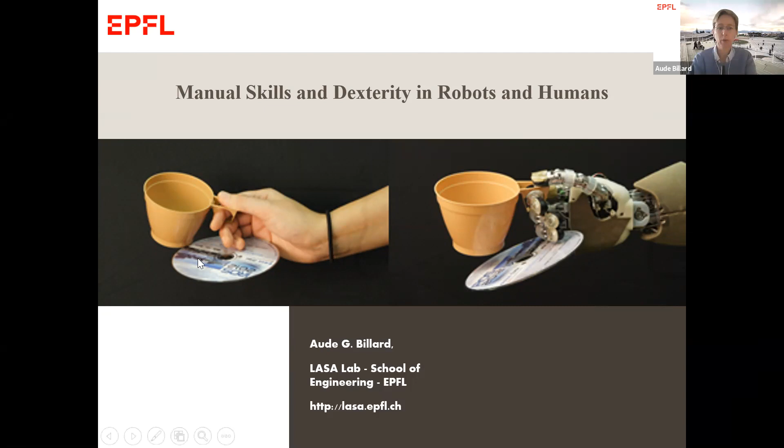The second part of the talk will be more about studying how humans actually achieve this type of dexterity. Two things are very interesting in these pictures, which are faked—not for the human, but for the robot, because the robot cannot yet do that. What I find fascinating is the fact that we really use all the degrees of freedom, multiple of them. If you look at what's happening in robotics, and it's still the case in my lab to a large extent, we can hold only one object at a time, usually at the fingertip. But humans can do much more than that—they can have multiplicity of configurations and hold different objects within the fingers, and they really use the full number of degrees of freedom that exist in the hand.

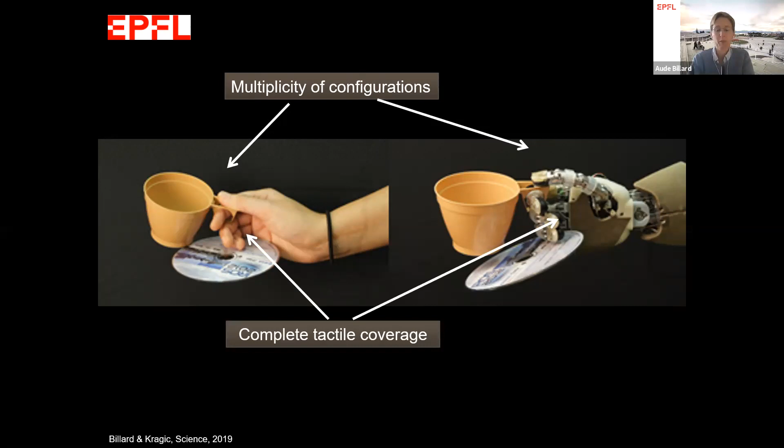And we are still far from that in robotics. Humans also benefit from a wonderful sense, which is tactile sensing, and we are capable of doing that much faster than robots can do. So we're going step by step towards this.

The first thing I wanted to present to you is this part of the work. In robotics, often, or for a very long time, people were trying to grasp the object around the center of mass to stabilize it, which makes sense, because you maximize your chances of not dropping the object. But if you look at the way humans manipulate objects, it's not that frequent that we actually hold it around the center of mass, for many reasons.

Here are a few examples of grasps that we do on a daily basis. Typically, the one in the middle, where we hold this cup from the very top, it's not that stable, but there is a reason: one wants to keep the lid down and not have the content coming out. It also happens quite frequently that we hold an object just at the very tip of the fingers when we want to hand it over to someone. It's polite, you don't want to touch the finger of the other person.

So these types of grasp are not that usual in robotics. There is a lot of work in robotics these days to try to infer what you want to do with objects, the functional components of the grasp, in order to infer what will be the best grasp for the function. But it's still very open-ended, and we don't quite know how to model this function.

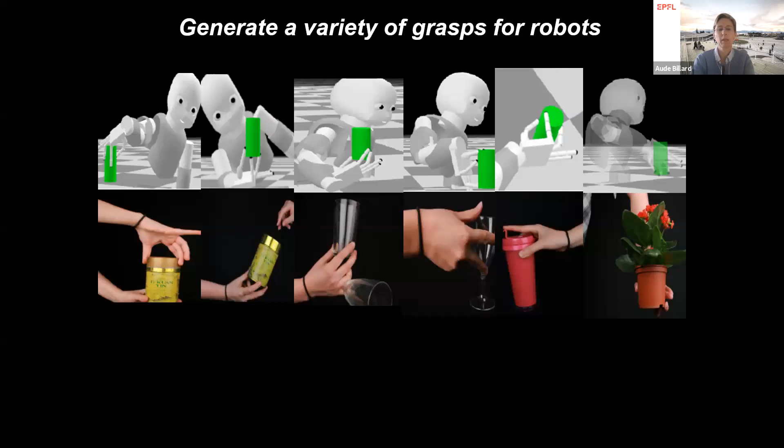Without having the fingers hit each other, you get all sorts of poses, and that's the funny thing, we got lots of them. I'm showing you this pose, and just below it, the equivalent pose in the human. But really understand that there is no intent in the way we solve this problem that gives the robot the information that this is the particular pose or motion we're looking for. It was simply solving for it from an optimal control viewpoint.

We actually got about 1,500 different poses, but when we looked at them, we could cluster them into subclusters, about 14 different categories. Now, solving for that at runtime is very slow. We can solve it on a big computer, but it still takes at least a good second, and from a robotics viewpoint, 1 second is slow, especially when you manipulate objects, because you want to be able to do that in milliseconds.

Can I just quickly ask, you said 1,500 for your 9 degree of freedom actuator? Yes, 1,500 solutions. So where and how is the cutoff for counting them as a solution? That's when the solver stabilizes, when it finds a feasible solution. Because it's a non-convex optimization, the solution you find may depend on the initial condition.

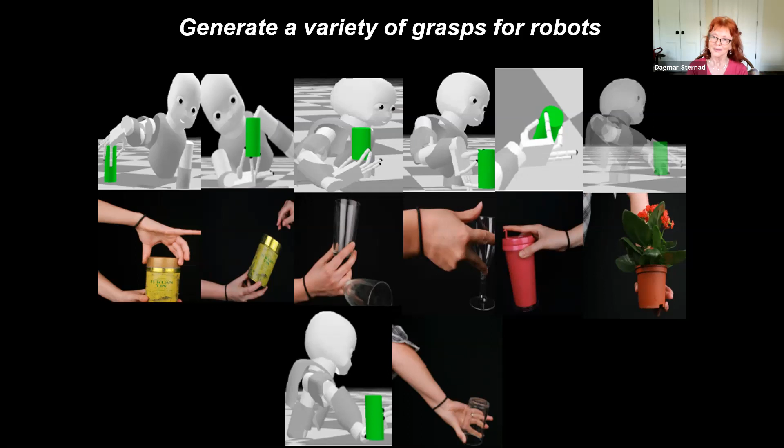So you can bootstart your solver at different configurations. We sampled the initial joints, different configurations to start with, and then we solve. So even though you have 9 degrees of freedom, you end up with many different solutions. But in the end, these solutions are not that different. What differs is the position of the fingers on the object, typically, and also the joint configuration of the fingers.

What is the error function here? How are you deciding what the solver is trying to optimize?

The solver is simply optimizing for torque minimization, at the fingers. Each finger will generate a torque to hold the object. Each of the joints, in fact, will generate a torque, and so we compute all the torques for all the joints. We have 9 of them. And we minimize the overall torque, or overall force if you want, that will be applied on the object. Then we have a set of constraints.

Many of those constraints are nonlinear. This is why it makes it a non-convex problem. Some of the constraints are that you have to satisfy the forward kinematics, so it needs to be a feasible grasp, kinematically speaking. You need to make sure the fingers do not intersect with one another, and that a finger does not intersect with the object either. They must be in contact, but not intersect.

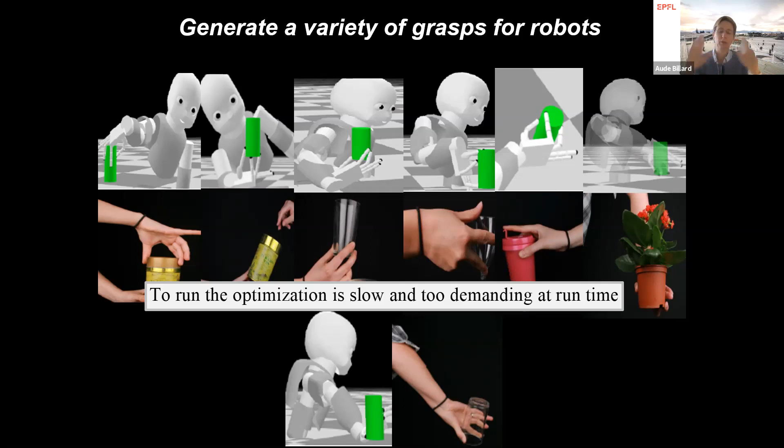Because it was so slow, we often like in my group to balance machine learning and control. So to do the retrieval faster, what we did was take all these solutions. We have a wealth of solutions, about 1,500 of them, and then we can populate this into a machine learning algorithm. So what we did was simply learn the distribution of feasible postures on the cylinder.

These postures are represented as the hand position with respect to the object, a relative frame of reference. The position and orientation of the wrist, if you want, with respect to the object, and then the finger joints. We reduced that to 8 finger joints because one was not very useful.

With this, we can generate—and this is of course just a visual representation. Here we've done PCA and took the first 2 principal components for visualization, but the dimension is much higher than that. From this, we learn a distribution, using a Gaussian mixture model, which is a mixture of Gauss functions. What you see illustrated here is the manifold of feasible grasps—within these highlighted regions, every single posture is feasible according to the problem we've set.

That means there is a kinematically feasible solution that satisfies all the other constraints. Everything outside is an unfeasible grasp. But once you have this expression, the nice thing is that you can solve and find a feasible grasp in milliseconds. So it's a bit win-win from both worlds.

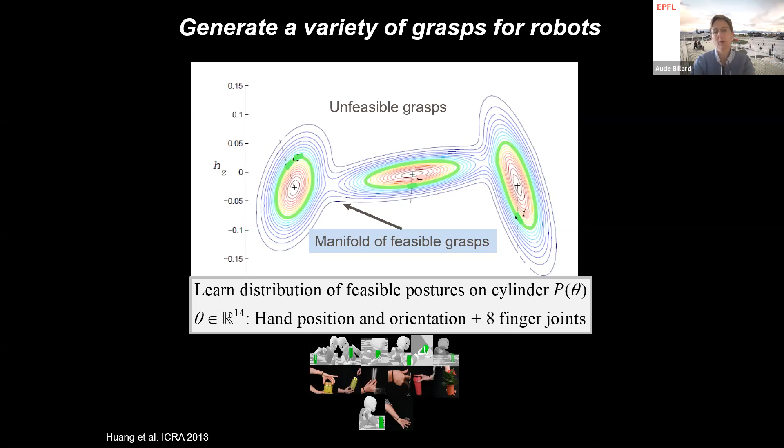You first use optimal control to find a solution to a very complex problem, but then you store that once and for all. It's a little bit like a human who will search first for a solution, and then once found, they just store it in memory. So it allows us to store it in memory.

At runtime, if we start from a location far from the object, like I'm illustrating here, all you need to do is a line search, and a line search is extremely fast. A line search on this probability density function—as soon as you enter an area that's highlighted here, which is highly likely according to the likelihood of the PDF, then you're satisfied and you know you have a feasible grasp on this object.

And you see here typically the example we can find in simulation. Everything was trained in simulation on a robot trying to grasp a cylinder. But what was really nice is that with what we call in robotics 'pre-shapes,' it was sufficient to have all these solutions to be able to grasp many different objects. We could show that we could really use this to hold objects in ways that are usually not seen.

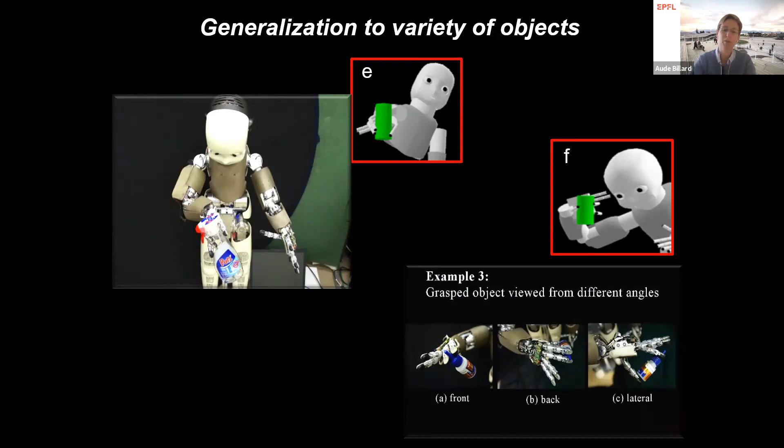I like this one particularly because you see the two fingers at the top holding the object just between the two phalanges, and also applying forces to rebalance the grasp on both sides.

Here are a couple of other examples, typically carrying a wine glass or champagne glass, which is something humans do with the thumb on top of the glass. There are many applications of this grasp—it's sufficient to have this pre-grasp to hold both a wine glass and a cell phone. You wouldn't think it's the same grasp, but it works for both.

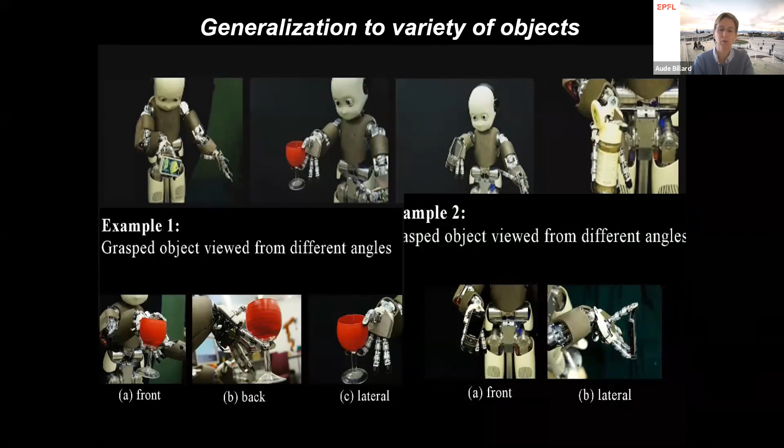Now, for roboticists it may be obvious that what we did not take into account was the problem of stability. It's implicit because we're computing torque, we're also computing force closure and feasibility, but it's too sensitive to being exactly at the right posture. So here's an example: if you're not exactly on the object where you planned to be, it will drop from the finger.

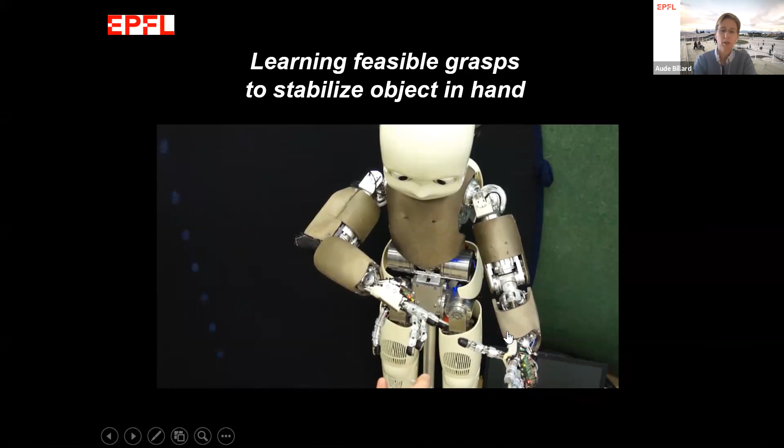So we decided to move this one step further, going back to our idea that we have a manifold of feasible postures, but they were purely kinematically feasible. Can we enlarge this representation to include things that are stable from a force control viewpoint? For that we needed a way of measuring what it represents to be stable, and since we're using machine learning techniques that can handle relatively high dimensions, we decided to include tactile information.

So we gather this tactile information, placing ourselves in the frame of reference of the object, and generate an estimate of how to control it. We estimate that we hold an object as if we had a spring and damping system. So what we need to learn in this new manifold of feasible posture is both the joint posture—the kinematics—and the force control posture, which we translate as a stiffness coefficient at the fingertip, and the relative position of the fingertip to the virtual frame representing the center of mass.

So we're basically learning the spring constant and the rest position of the spring, and we want to associate this with the tactile data.

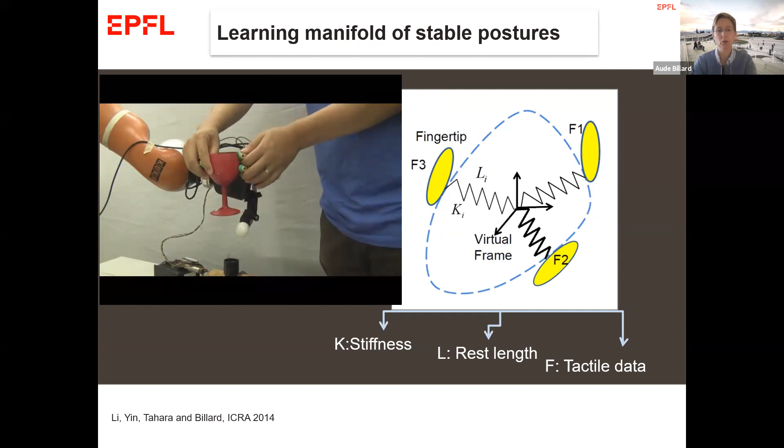We can gather all this at runtime and train the system by showing examples—this is one among many we could show. We show the robot: once you've chosen a posture, how much can you vary the position of the fingers on the object before you drop it? You can use this to learn the distribution—a distribution of position, kinematics, and also this notion of stiffness and rest length.

Then at runtime, when we get a perturbation like here, we can retrieve the expected stiffness and the expected position of the finger, which is translated from the rest length and the distance to this virtual spring. You can adapt to perturbation.

What you see here is that the robot refuses to adapt to this last perturbation. Observe that it adapts nicely to horizontal translation, refuses to adapt too much to vertical translation, and definitely refuses to adapt to rotation. That was done on purpose because we wanted the robot to remain stiff in certain directions—we could teach directional stiffness, so it's very compliant in translation but very stiff in orientation.

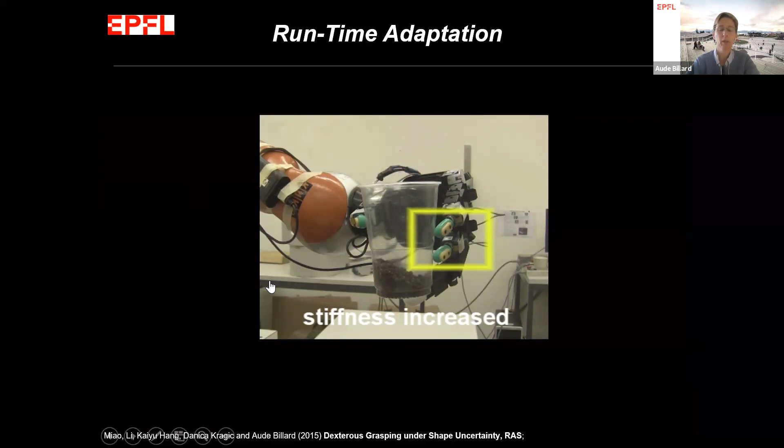We then pushed this further and trained it with many different examples, with different mass distributions in different objects and different joint configurations. This showed the robot could generalize, including changing stiffness according to a change of weight. The principle is always the same: you embed that into a representation of what is feasible in this kinematic and stiffness space, and at runtime you can retrieve the desired stiffness or the desired position of the finger.

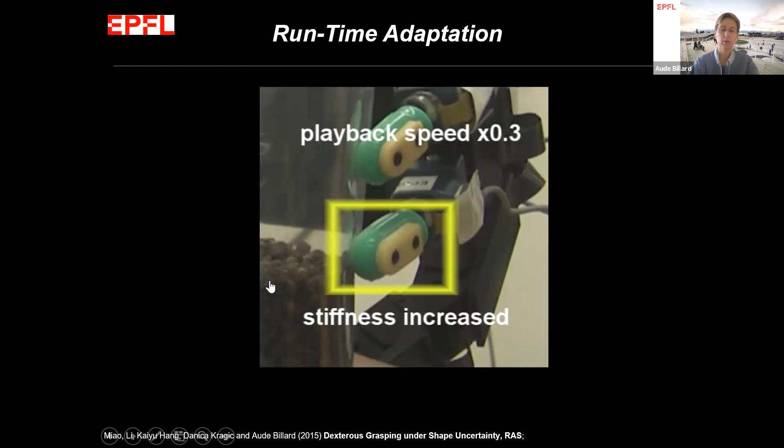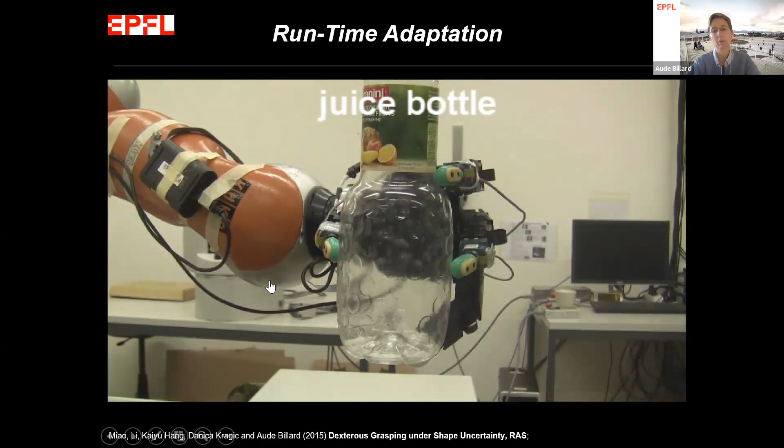That allowed us to do things we like in robotics that are still difficult. It seems very simple, but being able to move the finger to restabilize at runtime is called regrasp, and it's difficult because you have to do it very, very fast. We can also generate this.

For roboticists interested in more detail: you need one thing further—to know where it's feasible to move the finger fast. For that, we need a representation of the manifold of feasible posture onto the object, which one can also learn with another machine learning technique, and then we can project onto this manifold the solution in joint space.

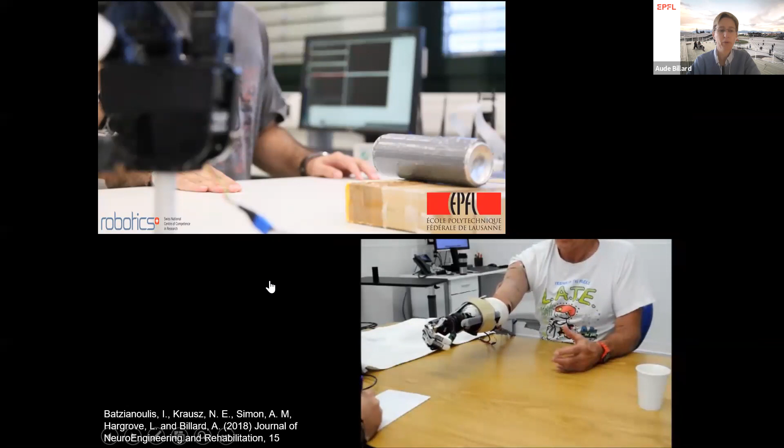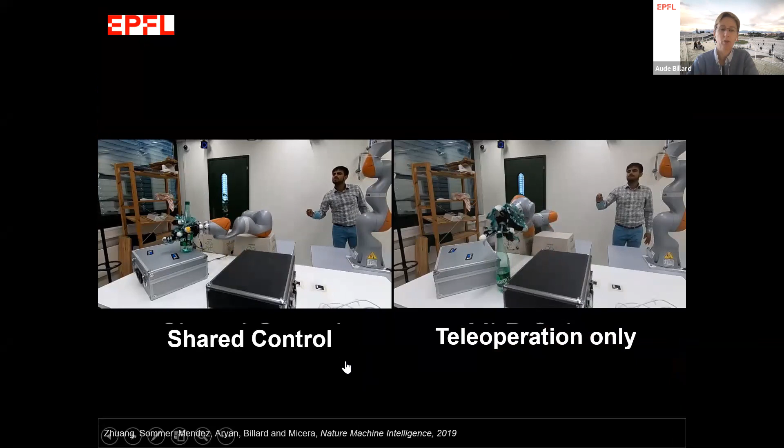Recently, with a colleague at EPFL, Silvestro Micera, and also first with Levi Hargrove, we worked on getting this used for prosthesis. You see here first the work we did with them to detect automatically a grasp from EMG data. Then we worked with Silvestro Micera to see if we could combine our control system to stabilize the object in the hand, shown on the left-hand side, used in combination with EMG control.

I'll play this a little slower. On the right-hand side is a control system which is purely teleoperated, only detecting EMG, which is noisy but still fairly precise. This is work done by these colleagues: they can detect the EMG to close and open the grasp, but also to control each finger independently. The problem is there are lots of noisy detections, so from time to time the fingers will reopen. We combine that with our stabilization controller, and we could show that it's much more stable with shared control.

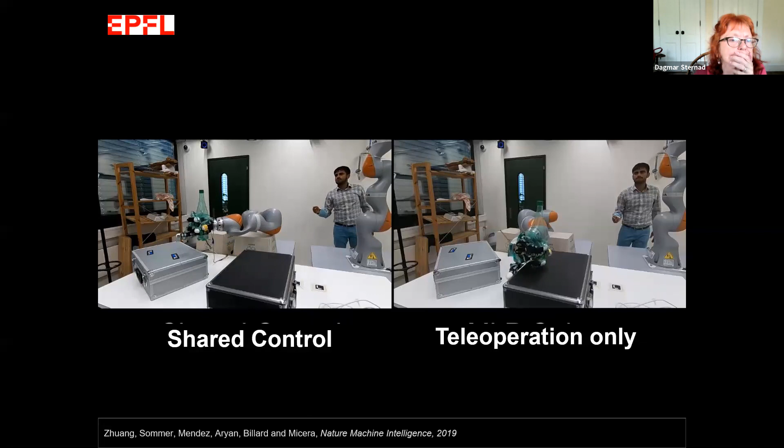So how many muscles, and how does it map onto the degrees of freedom of your hand?

First, we don't control the arm with EMG muscle signals. The arm of the robot is controlled simply by tracking the motion of the arm of the person. For the hand, I believe they're recording 9 muscles, but it's not my part so I'll have to double check. I believe they're measuring 9 muscles in the forearm that control the wrist and hand, but I'm not totally sure.

And how do we map that to the robot? We don't have enough—our robot has 16 degrees of freedom, so it's not 16 to 16, it's 9 to 16. We actually reduced that further, to 9 to 5. We control each finger separately: thumb, index, and so on. Our robot has only 4 fingers, but we control 2 degrees of freedom for the thumb, so it's 5 total.

And how do you decide on the grasp pressure, since that's so important to keep it from slipping out of your hand? We have tactile sensors—I don't know if you can see them—covering the inside of the hand. As soon as we sense the pressure, we have ways to rebalance the force and change the position of the finger to ensure a stable grip.

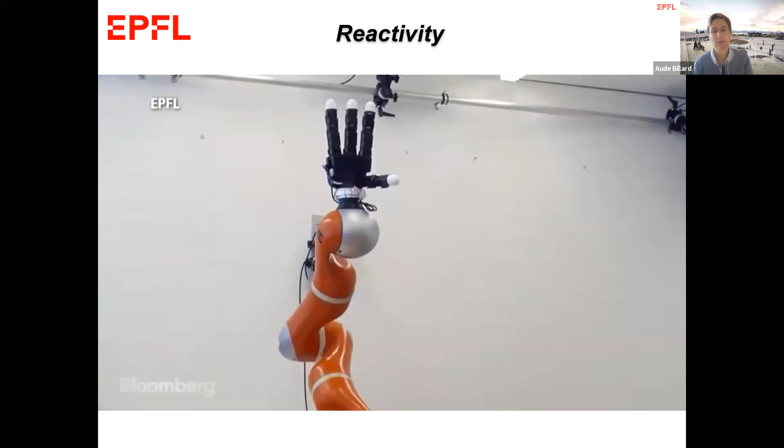This is a typical video some of you may have seen—one of the first examples of what we could do, which we presented in various places: catching objects in flight, as you can see here. What's the challenge? The challenges are numerous, but we made it very difficult in the sense that we wanted to catch objects that are flying fast and are not balls—in other words, objects that don't have three axes of symmetry, where you really have to orient yourself to catch it. That's where it becomes difficult.

This is where robots become a little better than humans. This is Lucia Pais, who was a very good PhD student in the lab. I'm as bad as she is, and most of us are bad at trying to catch an object like this—unless you train yourself, it's very difficult to catch an object that is not a ball.

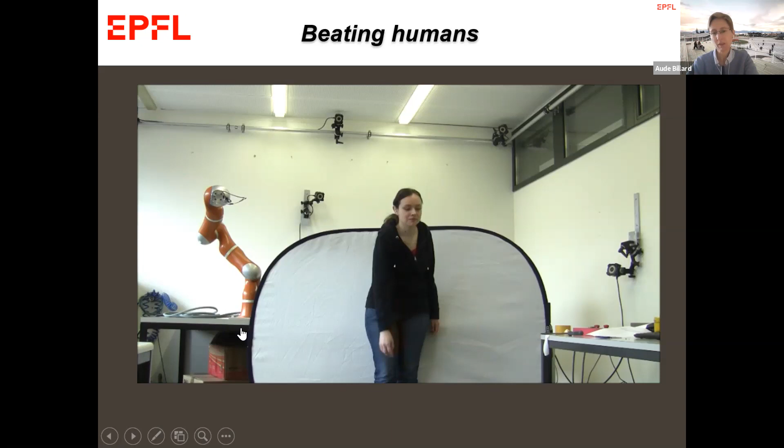So the way we approach this problem—I'll describe it briefly. For the robotists in the room, you're familiar with the fact that when you want to plan from A to B, you have to solve, possibly with optimal control, and compute a path that will eventually bring you there. When we just consider catching a ball, we need to compute a path that leads us to the ball, but we don't care so much about the orientation.

So the only thing that we need to care about is which path do we follow. Is it a straight path, but straight in what? In Cartesian space, in joint space? And as soon as you say that, you're already opening the box of what is the cost function. There are an infinite number of paths and an infinite number of solutions, and it completely depends on where you start from.

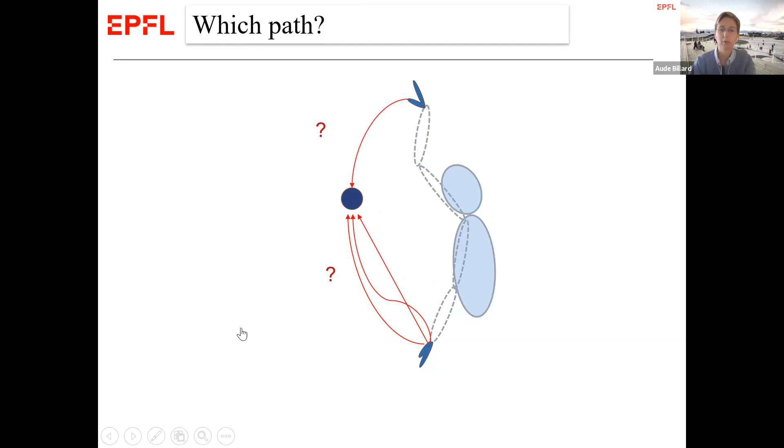So the way that we deal with this is to say, look, what we'd like is not to have to solve it at runtime anymore. We want to do the same as what I described before, maybe you solve for the optimal path, optimal in terms of so many different things: kinematic feasibility, dynamic feasibility. It could also be all sorts of other things, avoiding obstacles, minimizing torque, etc. But once you've solved for that, you want to store a control function once for all that you can retrieve at real time. The only way to store that is to have an actual explicit function, an analytical expression for this solution.

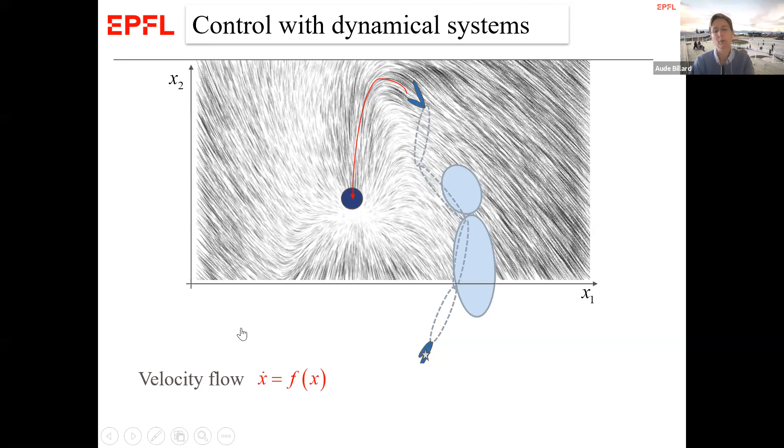So the way that we do that is by using a time invariant dynamical system. Here I write a simplified version of an equation, where we're going to control the motion of, for instance, the end effector, as I illustrate here, but it can also be done for joint control, and you'll see examples of this with a humanoid robot in a second. We control that in velocity space. So let's have a velocity flow, unique and described uniquely by this function f of x. And if I have a number of properties associated to this function f of x, then I have a closed loop control system that I can rely on thanks to those properties.

Now another question is, what happens if the object moves? Can I reuse this flow? What we wanted is to be able to reuse it, especially because we wanted to catch things flying. So clearly the thing moves, and you have to adapt to the motion all the time.

So a little trick is simply to place your frame of reference on the object, the origin on this object. Not just the origin, you can also align the entire frame of reference to the object, which is something we do to keep the orientation going. Then each time the object moves, and that's your attractor, that's where you want to get, that's your stable point, all that happens is simply that you incur a perturbation in this flow. But this flow has an infinite number of solutions, and all of them are sure to land you at the object. So we construct a function f of x, which we know to be asymptotically stable at the origin of the system, and the origin is on the object that we want to track.

And the question is, what is f? So to get f, we can either train a robot, typically by human demonstration. This is an example, you could train, move the robot, and show different examples. Or these days, we do it with optimal control. So we solve, as I explained before, with kinematic feasibility and all sorts of other constraints.

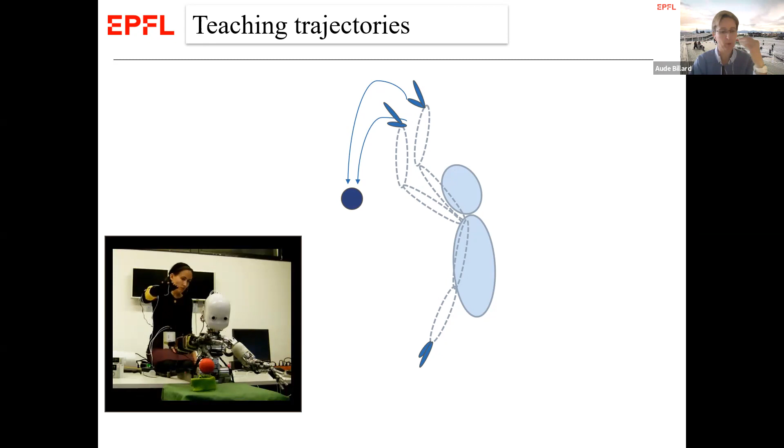Once we have that, then we can learn a function, and we want to learn this function and ensure it's stable. Of course, in machine learning, you can use all sorts of techniques to learn this function, but none of them by construction are stable. Here are example illustrations: if you learn this with support vector regression or neural networks, you'll have a very accurate representation of the dynamics, a very accurate expression for f of x, but you won't be sure to stop at the target. And it's catastrophic if you don't stop, because you may just generate motion on the object as you catch it and then let it fly somewhere else.

So we revisited this machine learning technique. We've been doing that for years now. We just go back to the optimization problem of the machine learning technique, and then we impose control constraints. The first control constraint is the one I mentioned before: you want to converge to a fixed point. Typically, you want the origin of your system to be stable, and you want the system to be asymptotically stable like this.

There are different ways in which we can solve that, but when the function is nonlinear, a lot of people use Lyapunov stability. More recently, we've started using also contraction theory, working with Jean-Jacques Slotine. But I'll present here the simplest version, which is Lyapunov stability.

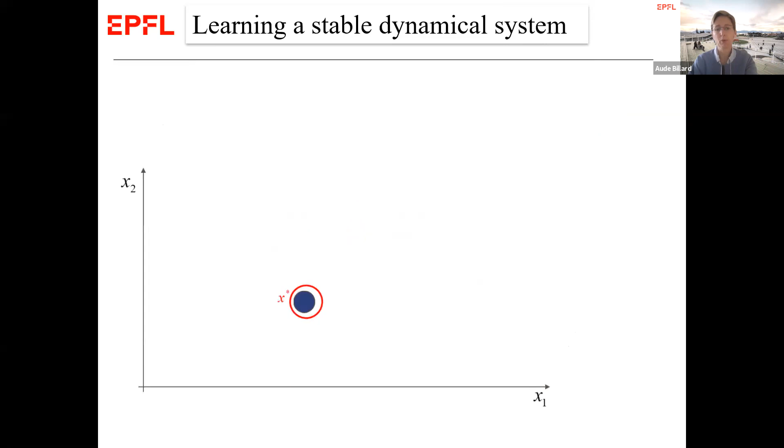So the problem is what is f and then what is v, because we have neither the Lyapunov function nor the function f. So we've shown different ways in which we can learn either f or v or both of them. I'll present to you only one example where we fix v.

So we have examples of trajectories. We want to learn now a function. What we can do is use, for instance, a probabilistic model, which is a distribution of velocity and position. I'll go a little quicker here.

When you want to query for the velocity, you have a closed form solution. In fact, for all machine learning techniques, when you query for the expected position or expected velocity, you get a closed form solution. So that's nice. That's the form that we're looking for. But it's parameterized, and the parameters are usually learned by maximum likelihood or convex optimization, etc.

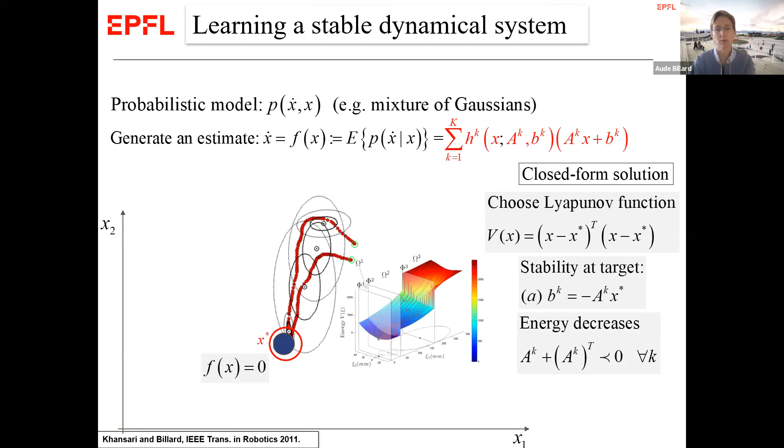So we revisited that, and then we applied a different function. Here, the Lyapunov function was simply quadratic, and then we derived constraints explicitly on the parameters of the machine learning algorithm. That will enforce stability at the target, and that will also enforce that the energy decreases such that your system is stable. That was the very first work that we did, and then we had lots of other things that are extensions of that. I won't go there. I'm happy to send paper.

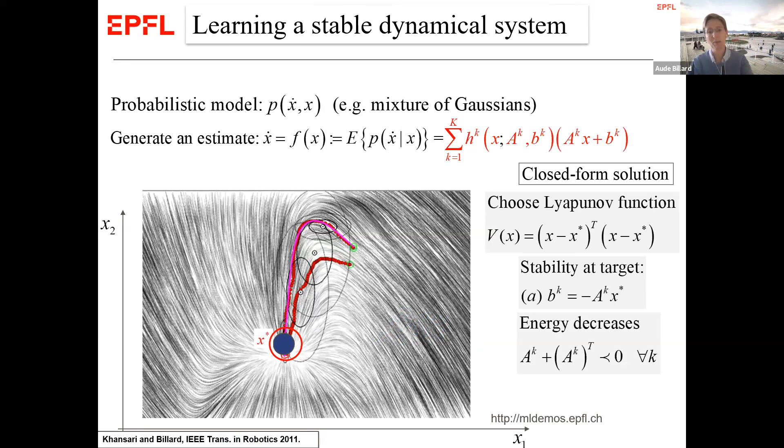And so that gives us this nice functional. You have it in closed form, and then you can do many things with it. So this is the simplest that you could imagine, is simply to go to the object and stabilize at that object, as you see here.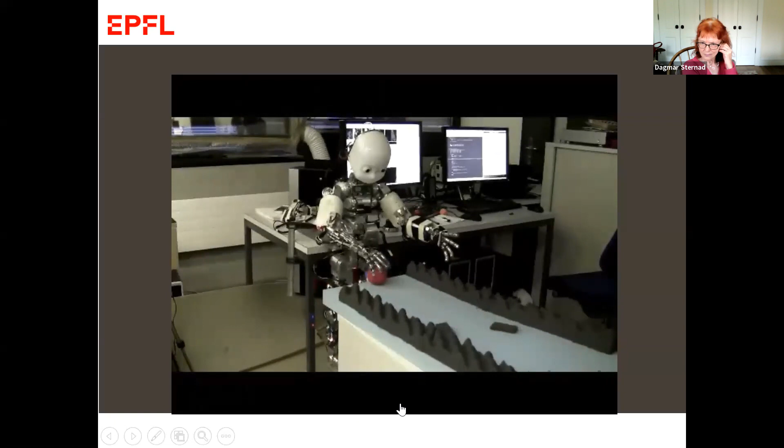Observe that the hand is really moving with the object, because the object is the origin of the system. So each time that the object is perturbed, then basically it's the same as if you're perturbing your hand. So it makes a bit this funny motion where the hand is adapting and basically moving with the object as if it's tracking or as if it's controlled implicitly by the object, which is the case.

We can also do this with multiple attractors. So if you want to catch an object which has a shape which is complex, like this one, then you need to have different grips. And this is a combination between what I presented at the beginning and this control system, that you may want to close on the object with different joint configurations, but you want to switch across those at runtime very fast.

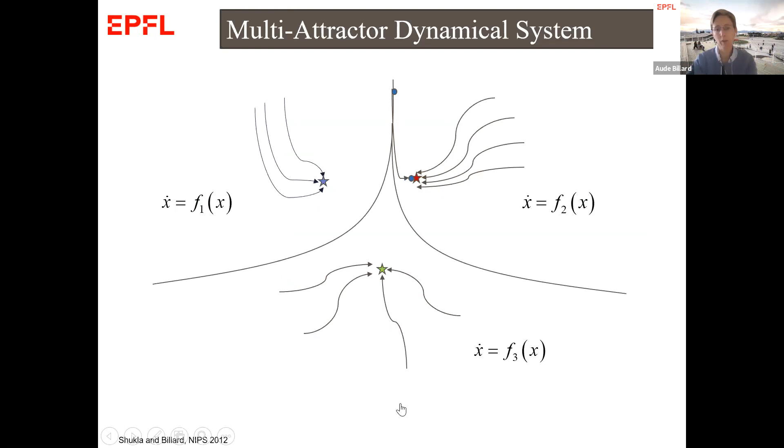So we took on learning not just one functional, but to learn a combination of those functionals. The machine learning technique, this is the same as learning a partitioning of the function. Then you want a partitioning such that one partition is stable at one particular attractor in joint space. Here you see it in 2D, but think of it as one grasp. And then another partition will send you onto another grasp. And if, instead of having 3 of those functions, you have one single function, then you can retrieve at runtime a control system that switches across these different grasps.

I don't think I want to go into details unless someone is really interested. So maybe I'll just skip that real quick.

But if you can—one other question. Will the robot attempt to catch an object which is impossible to catch, like if it's too large or outside the range of reach? No. Short answer, no. Let me get there in a few slides.

No, because we compute the workspace. We have also an explicit expression for the workspace. And so we're going to choose only the points.

First, we're going to go only when the object is reachable. So we'll travel the workspace, and then we'll have to choose the point that is the most likely to be caught within the workspace.

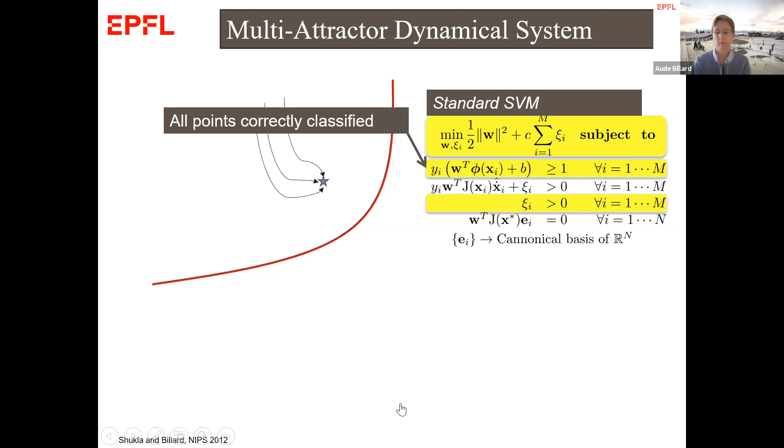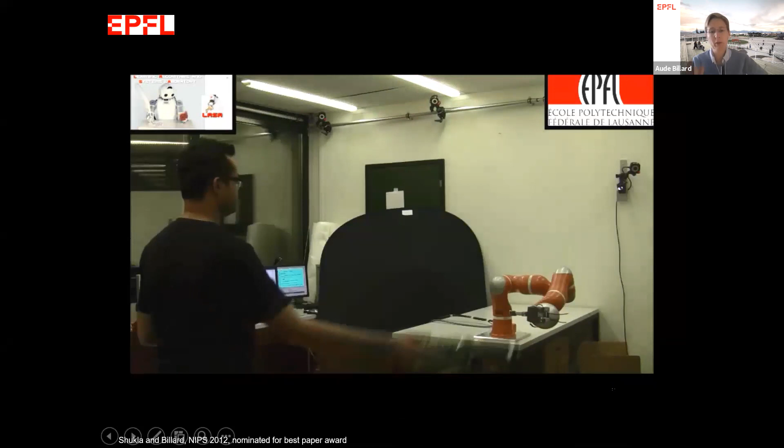Okay, so I'm happy to come back to how we derive this, but in the end, we have a closed form solution for that, and we can catch different objects. This does not answer the question that was just asked. Here you have just an example where we switch across 2 grasping points.

The neck and the bottom of the bottle, and we can switch across those at runtime. And here it's extremely fast, and you have about 0.2 seconds to catch the object before it falls. So you really have to switch across those without planning.

So, for the complex object, which is even more of a challenge.

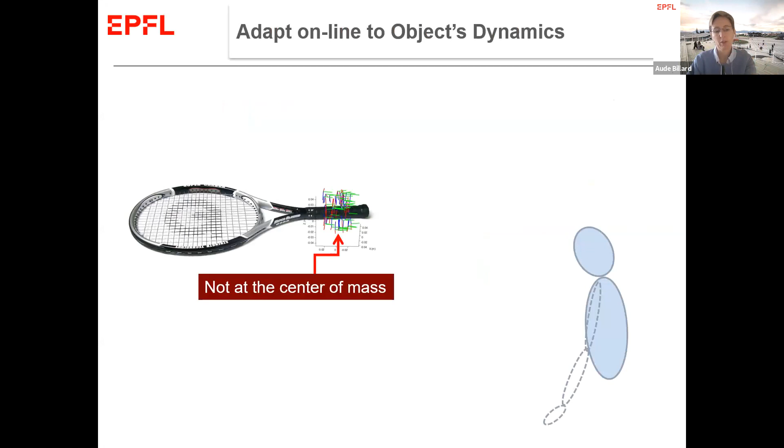This is the one that I showed as a teaser first. In order to do that, we need one more ingredient: the ability to predict ahead of time. This answers the earlier question, because deciding how to catch the object isn't just deciding where to catch it with a big or small grasp, but also where in space. As I need to travel there very fast, I need a good estimate of where it's going to land within my workspace. So to do that, you first need a good estimate of how the object travels in space.

And it's not so trivial, especially when the point you want to grasp is not at the center of mass. Because when it's not at the center of mass, the trajectory does this - what typically happens is that the object looks as if it's going towards you, then going back, then towards you, then going back. So it's really not a ballistic motion.

So to get an estimate of that, we used machine learning again. We threw these different objects in space, and tracked very accurately the position of the handle, or the point we wanted to grasp, with cameras on the roof that can track at about 240 hertz. Then we learned a model - I write here the equation, x dot dot - which represented for us the translational acceleration as well as the rotation. We need to account for both the translation and the rotation of the point we want to grasp.

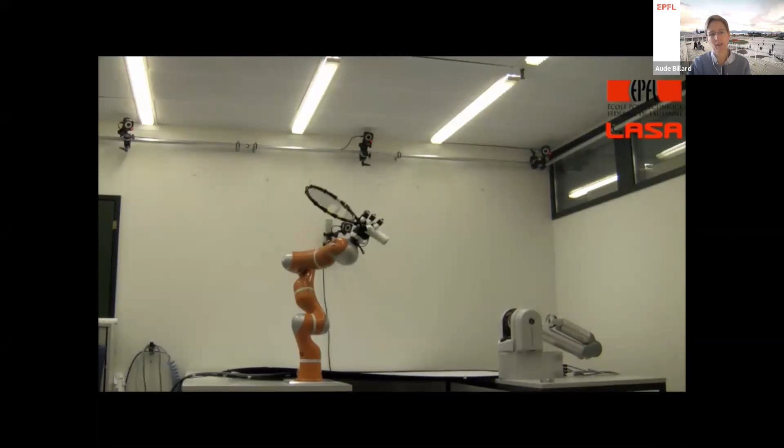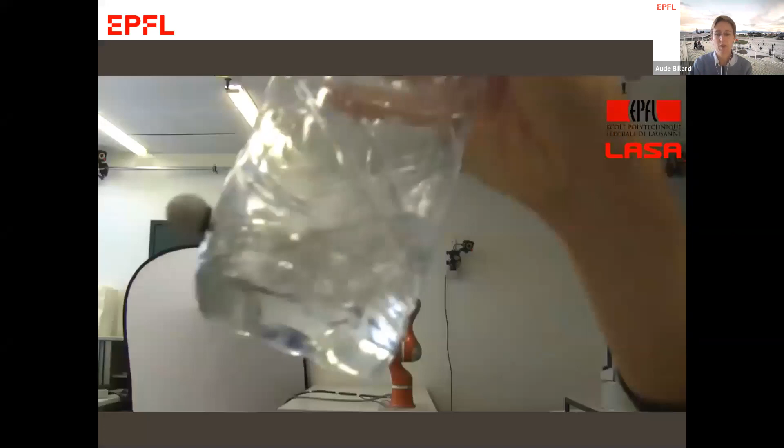So these are just a couple of videos where you can see the adaptation - especially when slowed down, you can really see how you have to orient the hand just at the last minute. It's also a little more obvious for an object like this one. Here we have a different hand which is a little more robust, and that needs to adapt to a different orientation. So here you can really see that you have a need to predict where the object is going to land, and a need to orient and change the posture of the hand and close the grip simultaneously.

And you cannot have a fixed timing for closing the grip, because it totally depends on the duration of the flight. And this will depend on where you decide to catch the object. And since you change your estimate of where to catch the object all the time, then you have to change also your estimate of when you grip it.

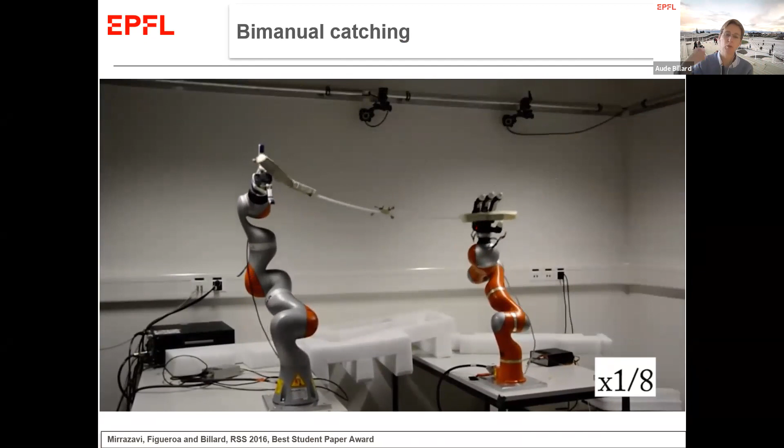We also extended that to be able to reach more complex objects, such as a flying bar here, in synchrony. This work, I won't go into detail, but here was really exploiting this notion of coupled dynamical systems - so we could couple the two arms so that they reach simultaneously. This concept is completely borrowed from human motor control. It's the famous concept that if you reach with your two arms to catch, there is one slowing down and the other one accelerating, so that you reach a point at the same time.

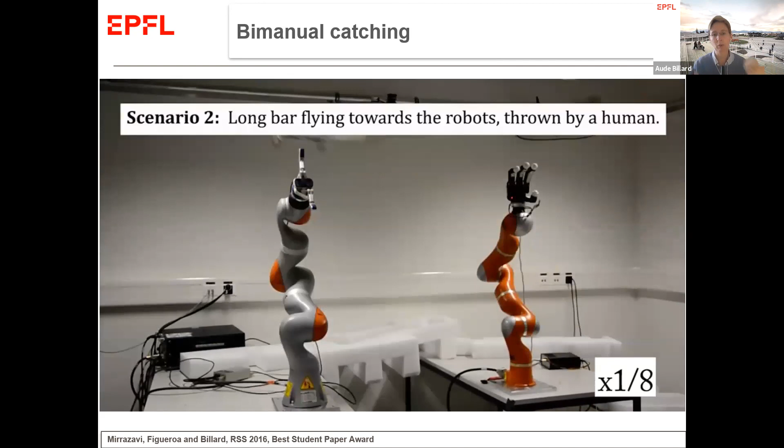And this coupling seems to be innate, from what I understand. So we put the exact same principle - a coupling into these two robots such that they will reach their respective origins, their respective targets, in synchrony, by coupling the two equations. And it's quite nice because you see them do a completely different trip - sometimes one will go down, the other one will go up. It totally depends on how the object is flying, but they will get there at the same time.

We also extended the system to control for force and to adapt. This is the adaptation for control, being able to hold objects stiffly while still being compliant, and at the same time flexible enough to adapt to orientation and position.

For now we just have two robots holding an object stiffly, but you can break the grip and get them to go back to the object in synchrony. So you have synchronization, but here it's not just kinematic, it's also in force. You see that you can move the object and they reorient simultaneously to go grasp the object with the right amount of force.

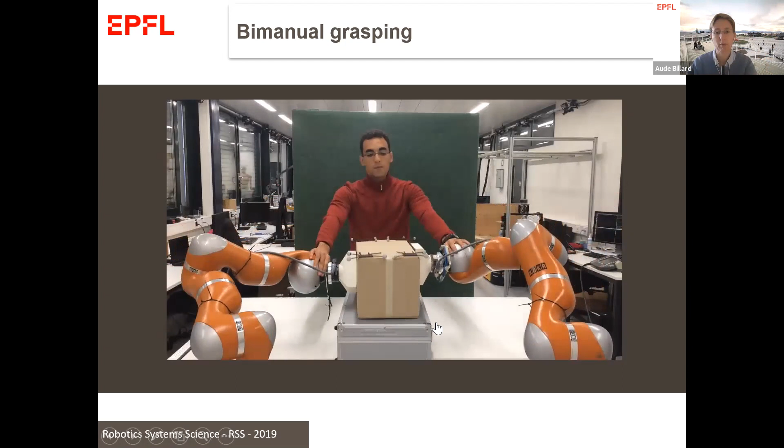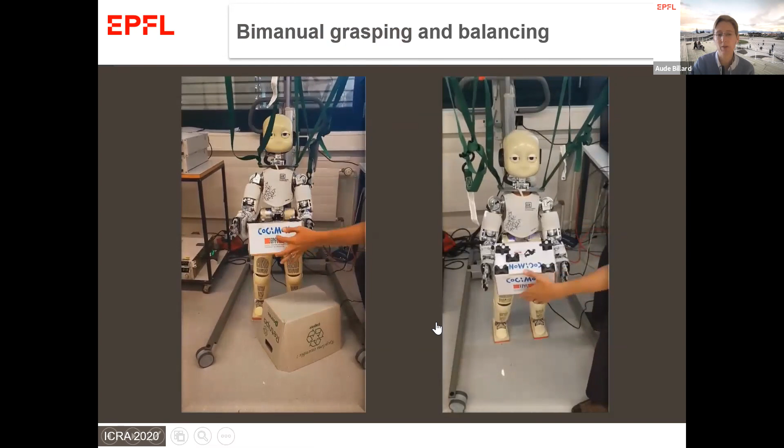We've also extended that for controlling a humanoid robot, so controlling for balancing as well as holding an object, and controlling for perturbation as well. I'll go a little quicker.

We can combine one further thing between controlling the dynamics, the navigation of the system, and the grasping.

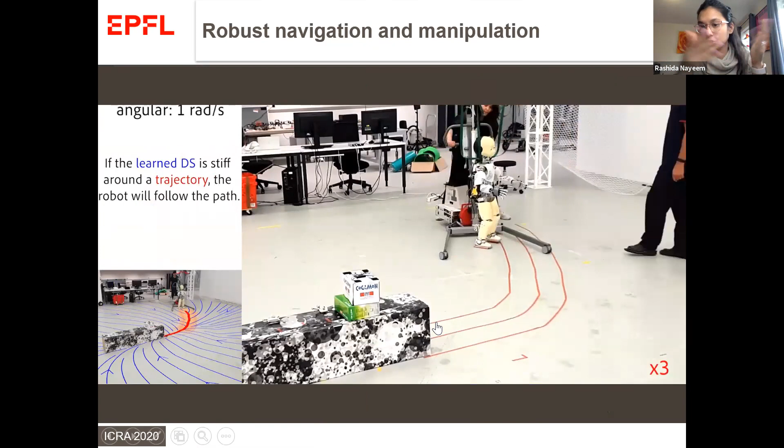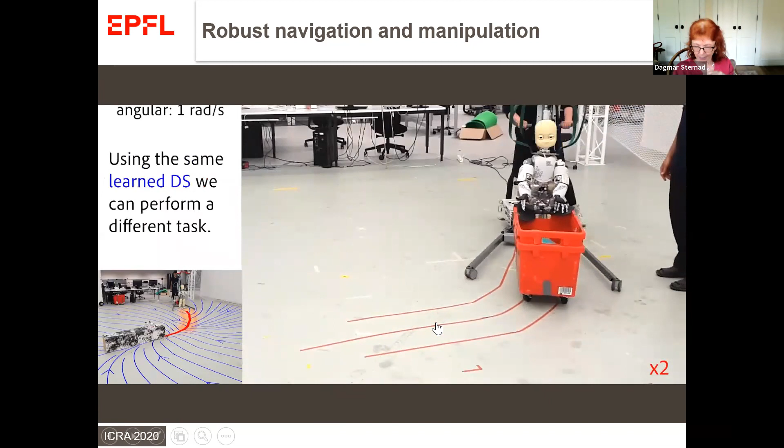There's a question from Rashida. Hi Professor Billard, in the catching task, how did performance change as a function of coupling, and could coupling change in real time? I could hear you very poorly, unfortunately, could you please repeat, there was a bit of noise. I repeat Rashida's question: she was asking how the catching changed as a function of the coupling, if you changed or looked at different couplings, and whether that coupling strength changed during a single catch. I guess this was Rashida's question.

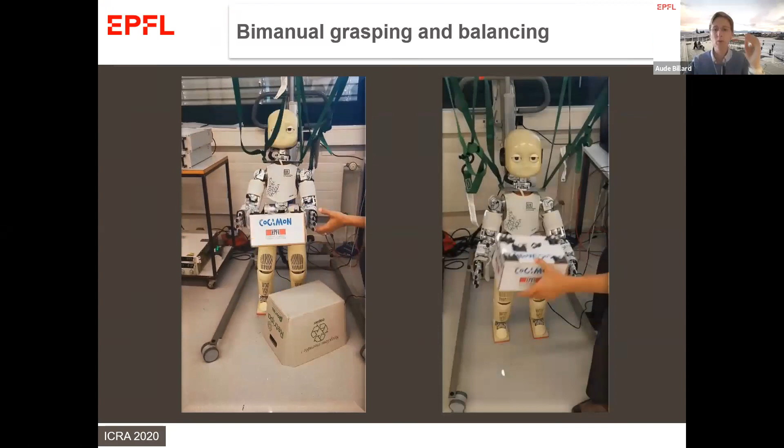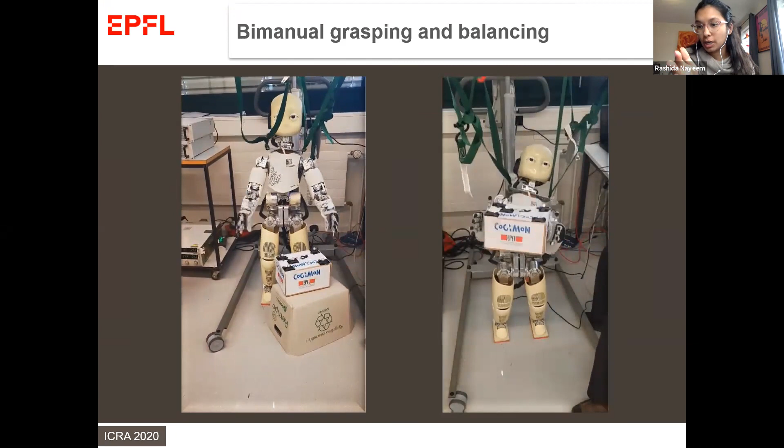Dagmar? Yeah, could you hear me? I lost sound for a little while, I think the problem is on my side, sorry, can you repeat? Rashida, why don't you go ahead. Yeah, Professor Billard, I was wondering if performance changed as a function of coupling, and if coupling parameters could be adjusted in real time.

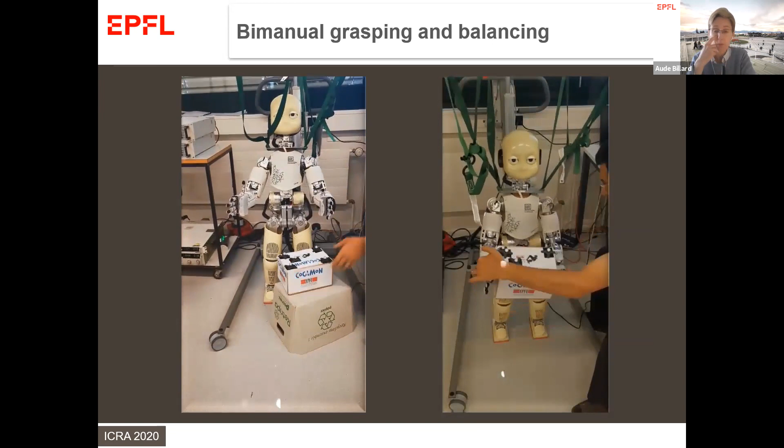The performance for the catching is completely dependent on having the right coupling, that's absolutely clear. And if the coupling can be changed at runtime, it could—we haven't done it, but you could do it certainly. The question is, how do you change it? If you want to prove that your system will be globally stable, so that both arms reach the same point as you're changing the coupling, you will have to have some constraints on how you're changing the coupling function. The change must be such that the speed at which you change the coupling is slower than the speed at which the two systems need to converge.

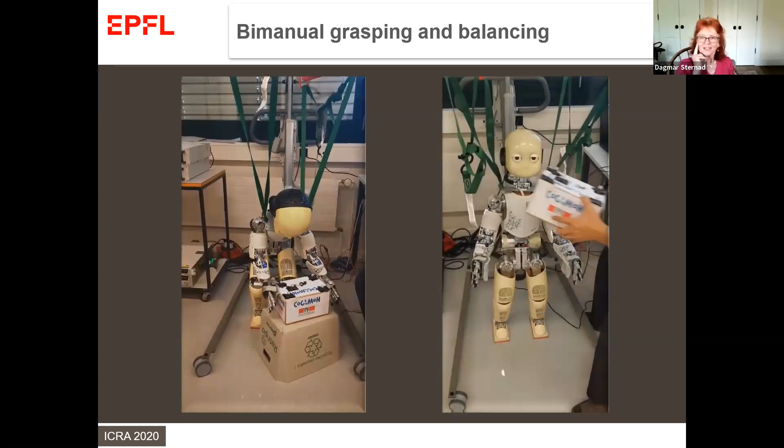Just an idea—there's a limit to what degree the human hands want to do very different things, so you could have a symmetry constraint or antisymmetric constraint, so that... yeah.

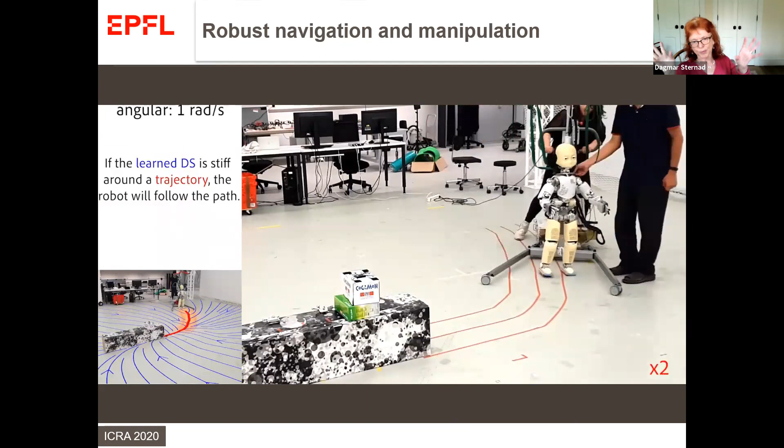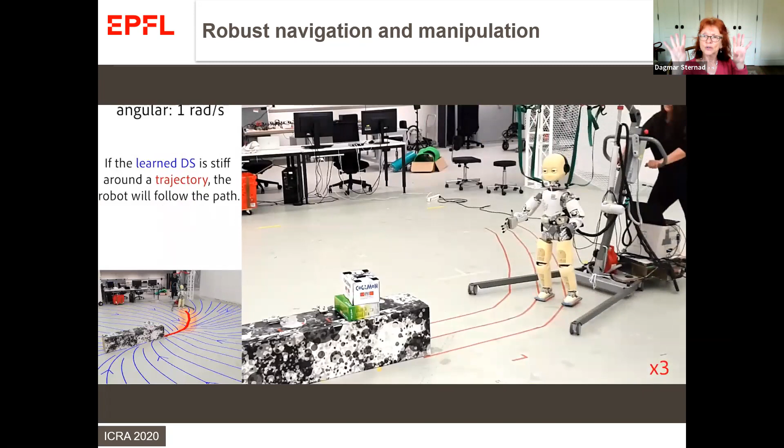Did you hear me? Yeah, I could hear you. So you mean one could add other constraints to decide how to move? Yeah, I was just thinking that your two robot arms performed very different movements, which on the one hand is a nice demonstration, but I think human hands have limitations in how different they can move. So that could be an addition to potentially change the coordination between the two hands.

Yes, certainly one could add other constraints to adapt the coordination if need be. One thing we also looked at was when you want the robot to grasp things and the two arms have to cross their relative workspace, you don't want them to hit each other. So you also want them to travel in a workspace that keeps changing—it's a deformable workspace.

As the two arms come close to one another, the workspace of the right arm becomes reduced, and as the left arm moves away, suddenly the workspace of the right arm becomes larger. So it's also possible to model that, because when you model the dynamical system, you can also model a region in which the dynamical system is valid and can travel in space. You can model this region as a shrinking region that grows and decreases. These are a few things we've looked at, but mostly in Cartesian space, not in joint space, which is a more complex problem.

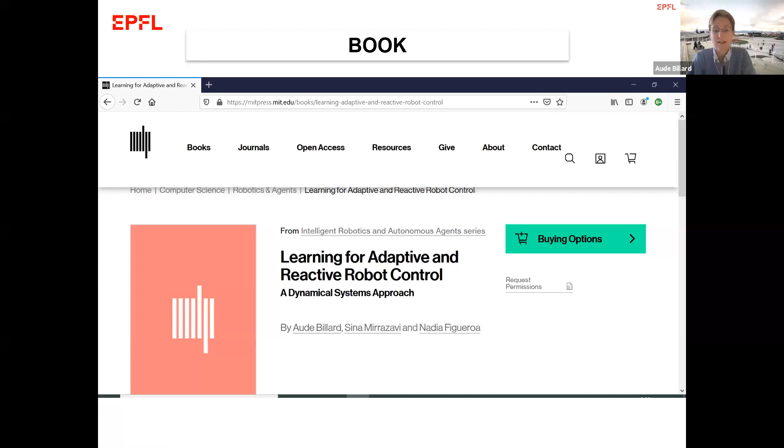Does your catching algorithm use a model of the gravitational field, or is it based solely on the path of the object? It's not there explicitly, but implicitly. When you write the equation, you simply say the acceleration depends on the position and the velocity. You've just written Newton, and you're not saying anything else. So this is learned implicitly in the parameters of the model. We could have written gravity, certainly, but that would mean we know the mass of the object, which we did not want to know in advance.

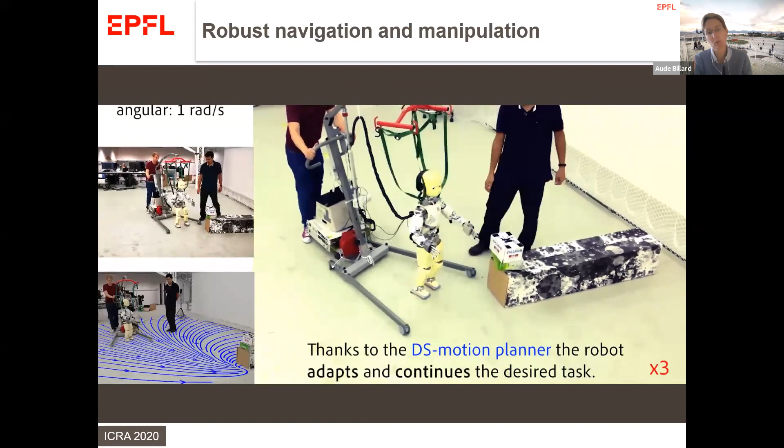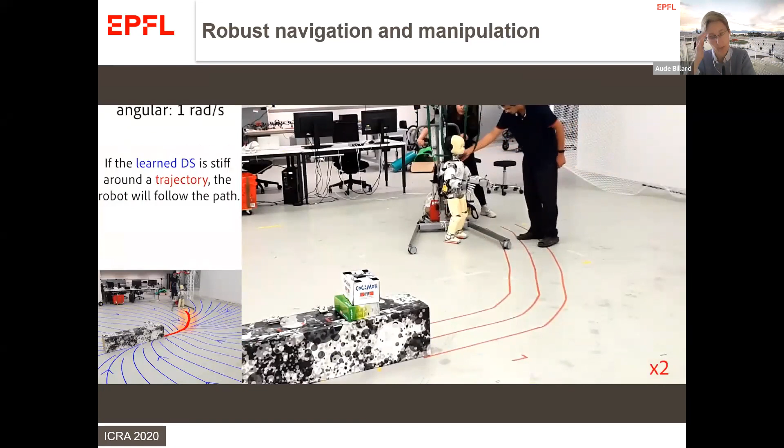It's particularly the case when we throw the bottle, which is half filled. Yes, we could measure the filling, but the interesting part when throwing an object with liquid in it is that as the object travels, the liquid travels too. So the mass is not constant - well, the mass is constant, but the distribution of mass is not constant, not the matrix of inertia.

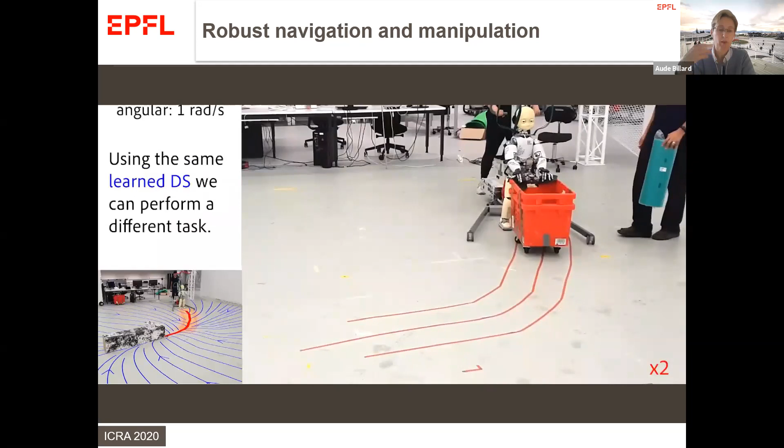So what is nice is that you can learn how, as the object travels and rotates in flight, its dynamics will change. This is due to many different aspects. Some are the change in mass and mass distribution - gravity plays a role, certainly, but also in conjunction with the distribution of mass. Other aspects which are more complex to model are friction, which is quite difficult on a racket, for instance, because the racket is very unhomogeneous. Yeah, and air drag and things like that.

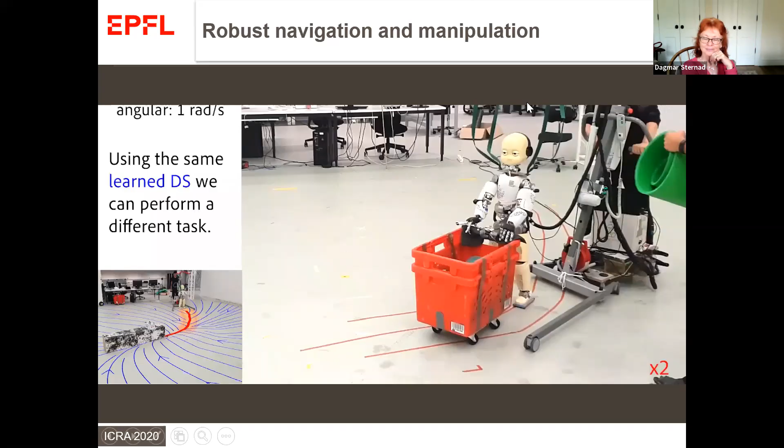I had one question. Since Dagmar offered, I would have waited till the end. I was wondering, you sometimes have like 3 fingers - of course you need the thumb, but 2 digits here or 3 digits or 5 digits. Is it just determined by the task, or does it give some computational ease if I have fewer fingers? How does adding these 2 fingers help me or create problems for me? Or even more than 5 fingers? How does that work in this robotics world?

How can I answer that briefly? In robotics these days, you don't have at your disposal so many possible hands, unfortunately. First of all, if you don't develop hardware yourself, you have to buy hardware that exists. The majority of people still use grippers, which are really 2-finger, because it's handy and there are many different reasons. You can already do quite a lot with just 2 fingers. For 3 fingers, just having 3 is less important than knowing whether you can control them independently.

There are very funny configurations. Sometimes you have 3 fingers, but you can move 2 of them - you can move these 2 and enlarge them, and rotate, which I cannot do with my hands, so that at some point they are all equidistant, maybe exactly the same distance between them. That's very handy, typically for symmetrical objects you want to hold. And if you couple that with a 360-degree motor, you can rotate and put in a bulb much faster than a human could. But it works only for certain objects.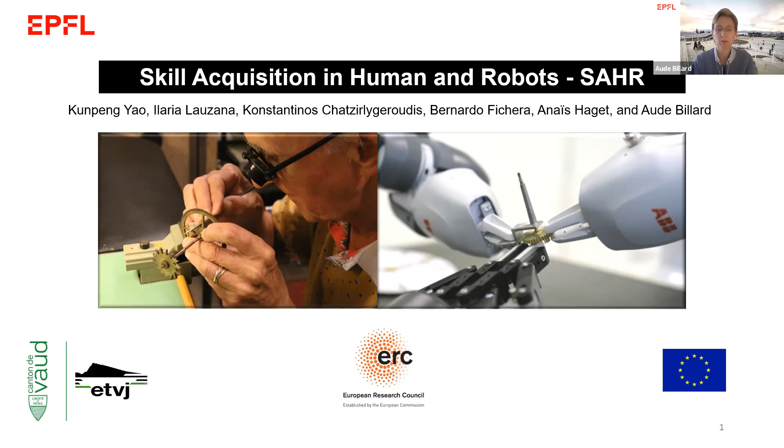So here is an example. What we've been looking at was to try to understand how humans acquire this dexterity and why they are so good at doing it. One thing I particularly wanted to understand is how humans manage when doing a skill such as watchmaking, a typical Swiss skill—how they manage to overcome sensory motor noise and sense so precisely the forces, and also know how to configure their two hands with respect to one another, because it's a lot of degrees of freedom to configure with respect to an object in order to manipulate it, and the object is often moving. But they do acquire that, so there was an attempt to understand how people acquire it.

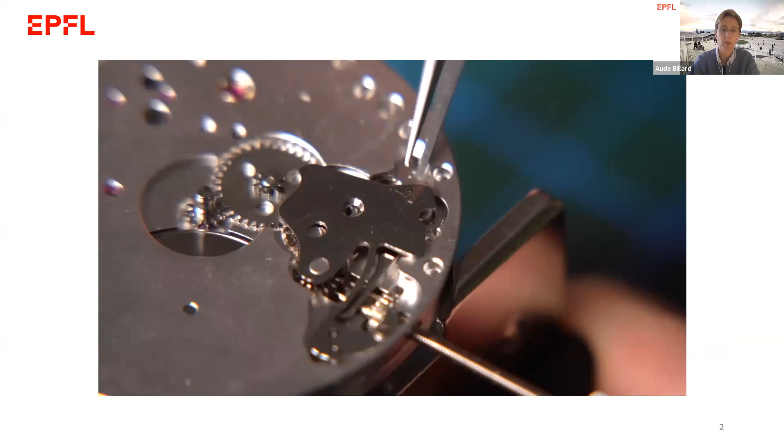Here is a video of a typical watchmaking task that we're looking at. You have a watch face, and what we're looking at is a specific subtask of watchmaking, which is simply to unscrew something called a plate, then under that remove the spring and then put the spring back.

You need to do that using two tools: one is a tweezer, and the other is a wooden stick. You need to place it, and both hands have to work in coordination, because that's the only way you can insert it. One hand holds the spring, and the other pushes in so it inserts at the right place.

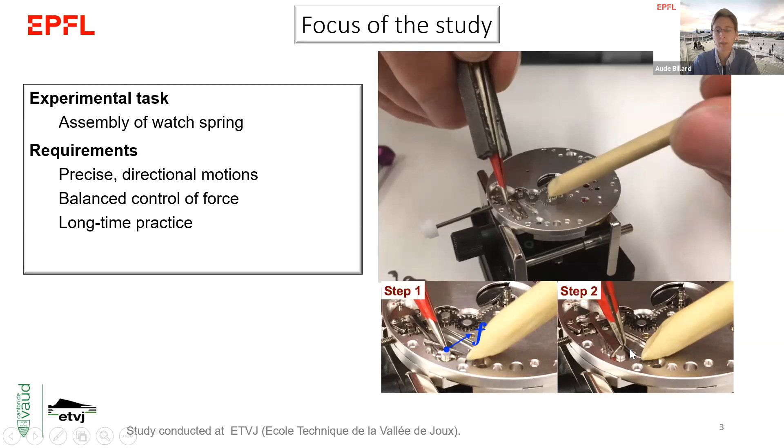So there are really two steps: first, position the spring and apply just the right amount of force, then in the right direction, to be able to insert it and have it fall into the step. Now it may look simple, but actually it's very, very difficult.

As you can see here, it jumps all the time. When we follow apprentices doing that, we see more failures than successes, really, and it's very annoying for them, because they try to put it in, and it jumps all over the place, and it's so small that it's difficult to see, find, and get back.

So we followed apprentices over the course of the study. In fact, the study lasts for 4 years, but the most important years for this type of manual skill are the first 2 years, and especially the first year.

We followed a cohort of 23 apprentices, and we had 4 experts - the teachers - who are very skilled at doing that. We had them repeat the same task over and over again, and we recorded what they did. In order to record that in a way we could model, we put a lot of sensors on them.

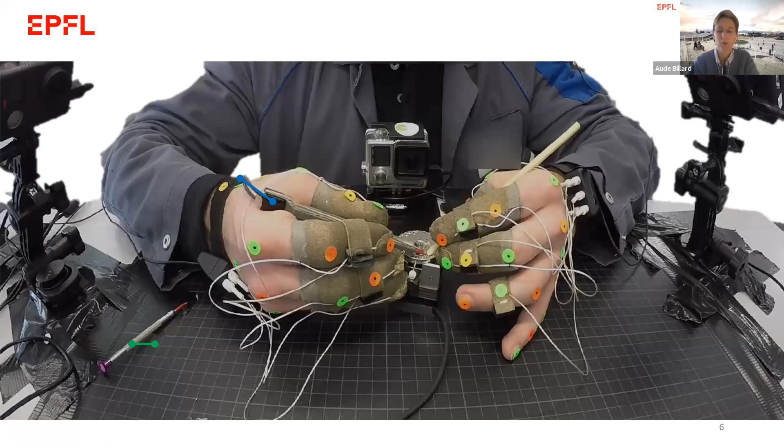The first thing we did was put a force torque sensor on the watch face, and then we also monitored the hand. On the screwdriver, the tweezer, and the stick, we needed to monitor both the kinematics of these objects as well as the kinematics of the hand.

We have sensors on the fingers which measure pressure. We have a 6D force and torque sensor on the watch base that measures the force and torque applied by the person onto the watch.

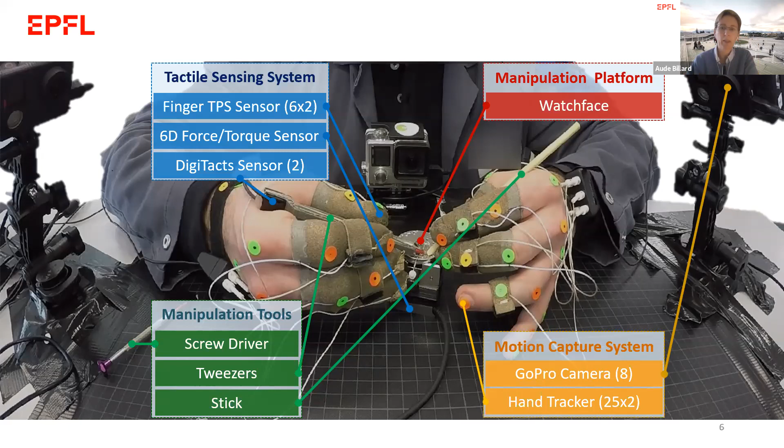We also record the position of the finger with a motion capture system using markers. These little dots are recorded by camera - we have 8 GoPro cameras that are highly accurate - and from that we can reconstruct the position of the fingers, as you can see here.

This is overlaid now on a video. So after recording, we can reconstruct the position of the finger, and from there reconstruct the kinematics of the hand. So we have the kinematics and movement of the hand, the pressure of the finger, the force applied on the watch, the motion of the instrument, and tactile information on the instrument.

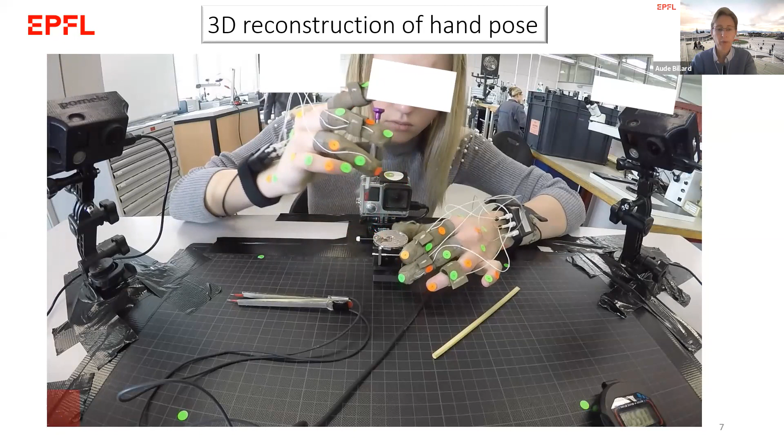Now I'll focus on the result of the first part of the analysis. The first thing we wanted to understand is what they learn when placing this spring, because it's complex - they have to learn how to position the hands, but also learn the task, and do it all at once.

It may seem simple to you, but for me, I thought there was really a lot to learn at the same time. And there is not so much verbal teaching from the teacher - the only thing that happens is the teacher shows once or twice how to do the task, and then the students repeat it over and over again until they achieve it.

So let's contrast a typical beginner. This is a beginner trying to insert this - I'll let you watch a little bit of the video. And this is an expert.

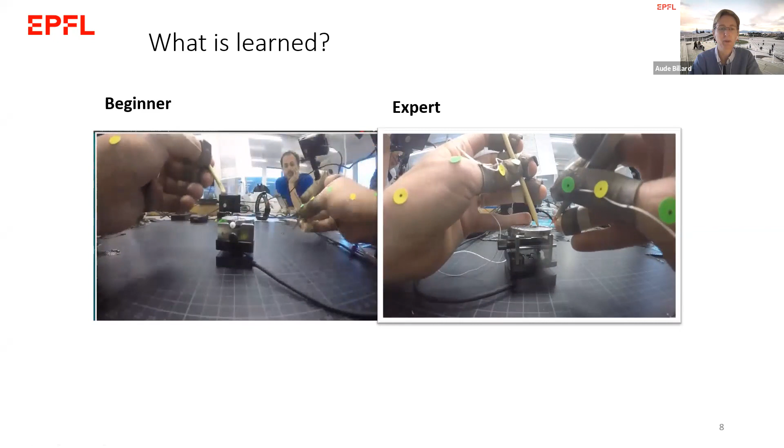And so if I were in the room with you, I'd like to ask you, what do you see a difference? Do you see a main difference between the two? Yeah, since we're not interactive, I don't know.

If I replay it, one thing you may observe is that the beginner keeps shifting, keeps rotating the watch all the time. In fact, many beginners do that. They turn it around, pick it up, turn it again, but not always putting it in the same position. They just do all sorts of orientation of the watch.

If you look at the expert, they start from some location of the watch, and then, poof, poof, motion, don't touch the watch anymore, and then place the spring. We have several examples of this.

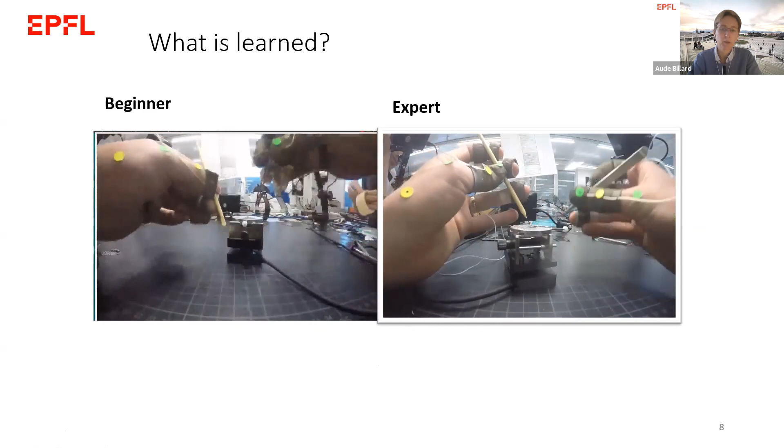So clearly the expert has a model of the correct configuration of the watch relative to the hand, and the beginner is learning that jointly with learning how to apply the right force, how to position the hands. All these degrees of freedom need to be learned, and they need to make sense at some point in the brain.

So we try to model this more precisely. What do they learn? What is the correct orientation of the watch that leads to success?

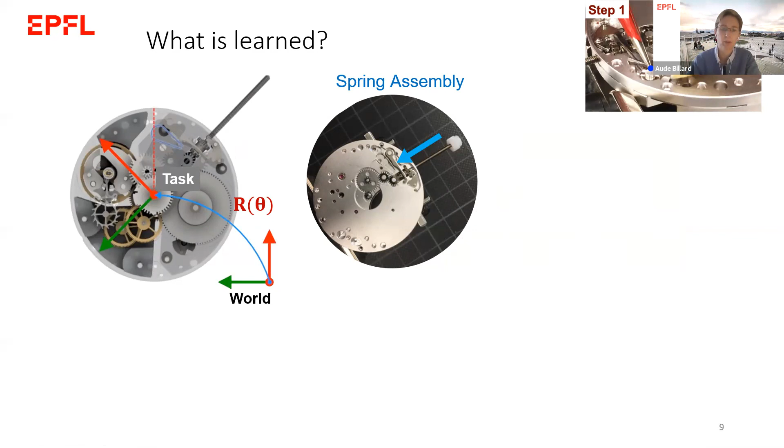Recall that we have the spring assembly. We need to apply force on the spring to insert it. And that's crucial, because if you apply the wrong force in the wrong direction, it jumps and gets out.

Clearly the orientation of the hand with respect to the watch and the force that you're applying, which needs to be aligned with the position in which you're holding the spring, needs to make sense with respect to what is feasible and what isn't.

But again, nothing is explained to the student. They have to discover that. So in order to understand this one step better, and also come closer to something that we know how to model, we want to see if we can model this problem from an optimal control viewpoint.

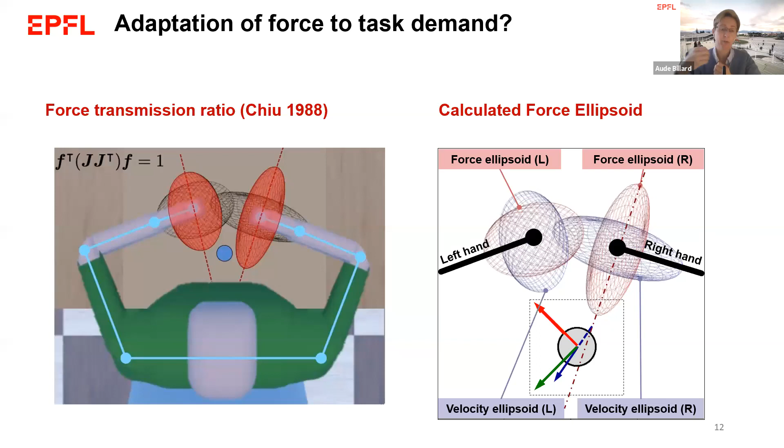But often also, the more elongated it is, the more chances you have to be able to apply more or less force, and so to be able to scale the amplitude of the force. So one can model that, and then we could use indices that exist in the literature to measure what people may be optimizing for.

So the first thing we looked at is a so-called task compatibility metric. It's something that will look at whether you orient your hand, so you orient your ellipsoids in force, but also in motion, with the requirement for the task, and how well are you aligned with this.

So I will not show all the results, but what we could show with such a modeling is that the expert subjects align better with this direction, the U, with also the optimal force transmission direction. In other words, their force ellipsoid is best aligned with the direction of U for the dominant arm, which for all our subjects was the right arm, than for the novice. I mean, that's quite obvious - that's how they are successful, but one can quantify it.

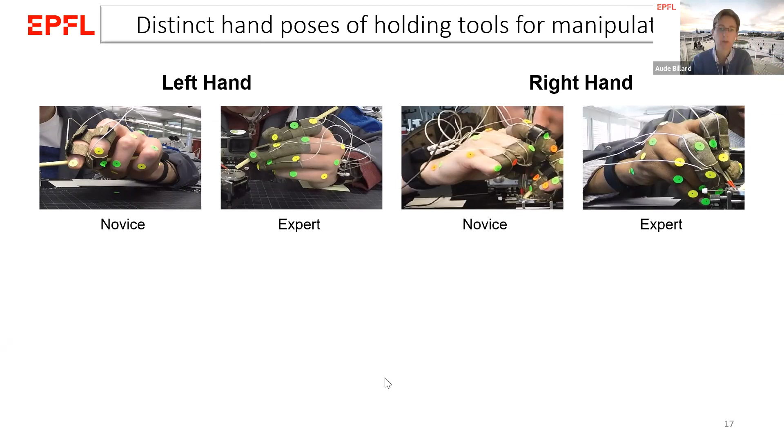Basically, we redid the experiments by looking very carefully at the position of the finger, and we contrasted two things: when the watch is fixed versus when the watch is moving. When it moves, you have more degrees of freedom to control for. With this, we were able to better understand how they choose to position the fingers in relation to the degrees of freedom to be controlled for.

When the watch is moving, what you observe is a typical type of distribution. Here is for screwdriving, which is the cell phone example mentioned before. One hand is supporting the cell phone or the watch, and the other is doing the screwing. But when the watch is fixed, you cannot move it. You'd think, okay, they should just do it with the right hand or the left hand, just screwing in with only one hand. But in fact, they don't do that.

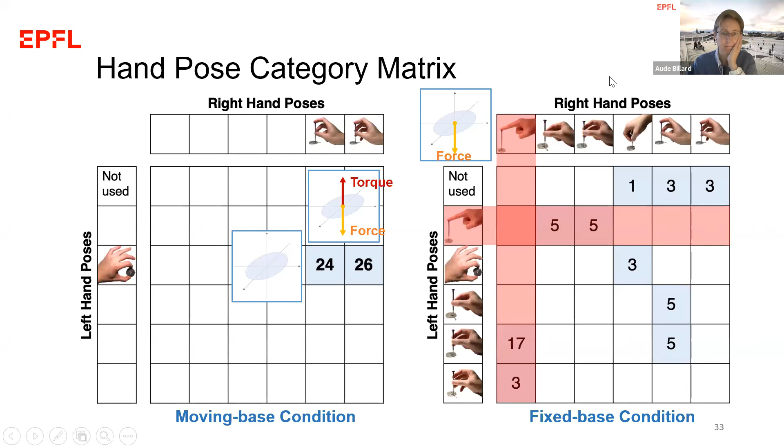Question, if I may. Sure. I had to step out, so you may have covered this and I missed it, but did you see any difference in the specialization of hand function between people who were left dominant or right dominant?

We had only right-handed people. In fact, there are very few people who are left-handed; we had only one subject who was left-handed in the cohort, so it wasn't sufficient to do statistics - this was in the cohort of apprentice watchmakers, and there we cannot control for that. We could possibly take other subjects who are not watchmaker apprentices, and get a better distribution of left-handers.

Do you have any idea if there's a sex difference? Sadly, there again, gender distribution is poor. There was only one female, so we had her, but we could not do statistics on this.

Yeah. When you're talking about very small forces, what is the smallest force they have to accurately achieve to perform some of these things, and what is the error they can have in that force to achieve the task?